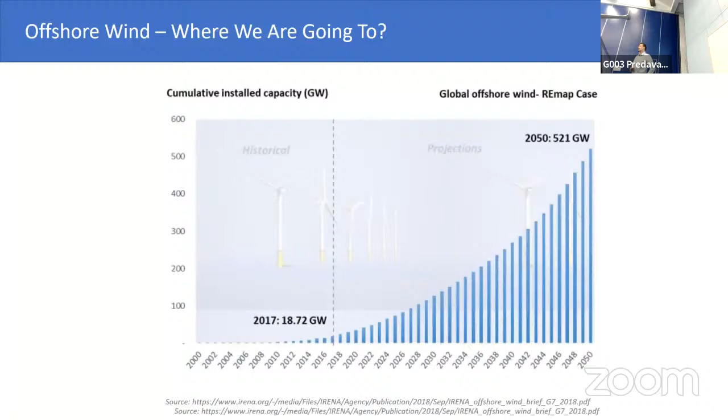So where are we heading actually? The aim is, up to 2050, to get more than 500 gigawatts installed. The European Union, who is leading in this, Europe as a whole, because actually Britain is leading, has the plan to have more than 60 gigawatts installed by 2030 and 300 by 2050. The market is growing around 25% yearly so far.

So what is the potential of the wind? The potential of the wind actually depends on the technology we are using in the wind turbines, but currently it's estimated at about 420,000 terawatt hours. This is more than 18 times the global electricity demand today. For comparison, Croatia consumes around 18 terawatt hours gross per year.

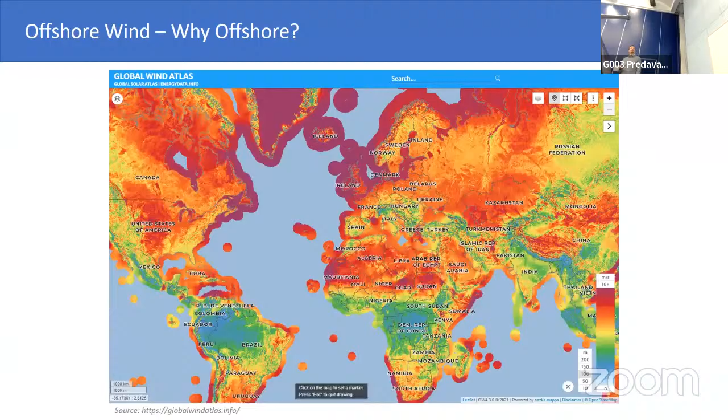And why offshore wind? This chart actually shows nicely why. The wind speeds are more steady and they are higher on average offshore than on land. And you see where the best parts are here, and the UK, as I said, is already leading in this.

So the evolution of wind turbines. They started as very small ones. When I entered the industry, around 2015, they were mostly 5 to 6 megawatts. Now the latest one installed and in operation is in the Netherlands, it's 11 megawatts, and they are currently testing 14 megawatts. When we are planning the new offshore wind sites around Ireland, we are planning for 24 megawatts, which is not even in development yet. But in 10 years' time, this can be the case.

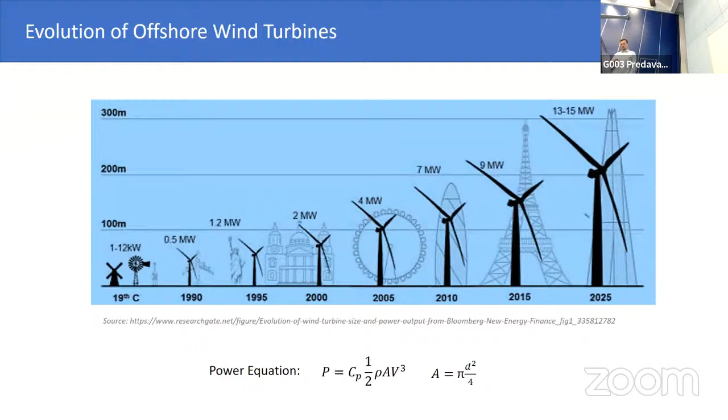And why are they getting bigger? Because the power equation tells us that there is a coefficient of how much kinetic energy from the wind we can get, and this is fixed, and practically the wind speed is fixed. It can rise a little as we go higher with the wind turbine tower, but by changing the diameter, we are getting more power. So this is why they are getting bigger and bigger. Currently it's around 230 meters diameter of the wind turbine.

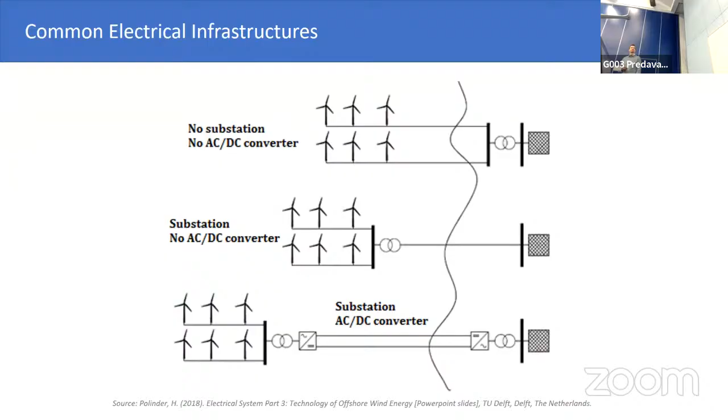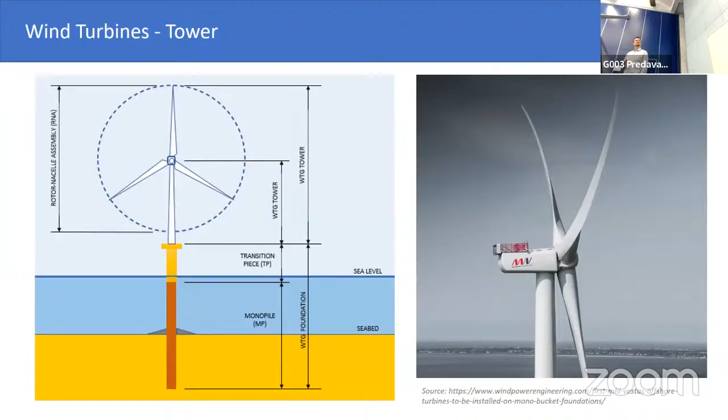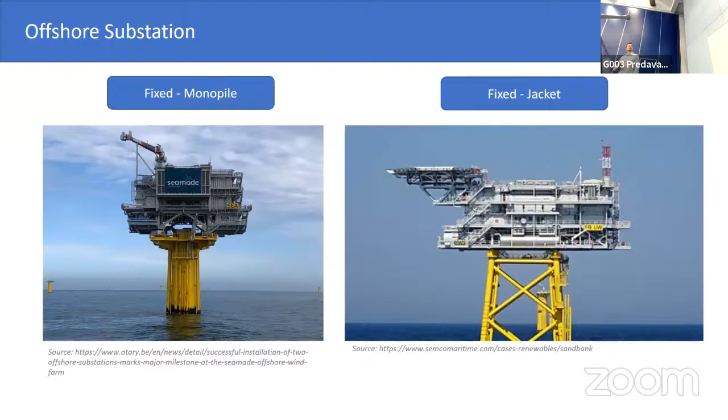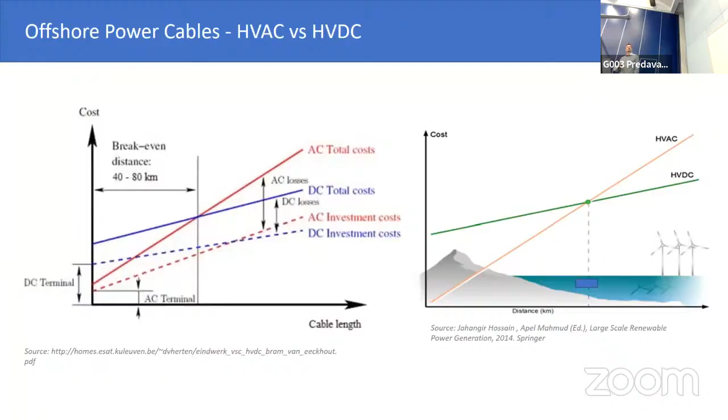Why is there a difference? Why are we using AC and DC cables? We are using them because AC cables are good up to a certain length from the shore. All the wind turbines actually generate AC power, so to have DC we need a converter offshore to convert it to DC current to be able to export it to the shore. And the problem is that this substation is around 7 to 10% of the total investment of the wind farm, which can be billions of euros. So basically, up to approximately 80 kilometers, the AC cables are cheaper. Then the losses in the AC cable become higher than the investment costs of the converter.

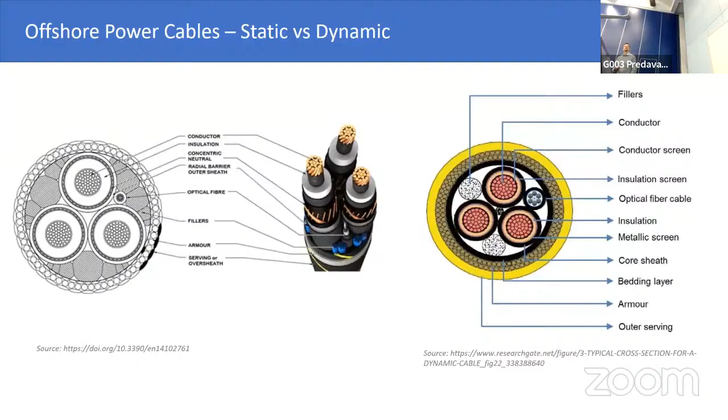This is how it looks. A cross section, 3 cores, and some optical fibers. Normally, the inter-array cables are all 33 kilovolts, and now they're becoming 66 kilovolt cables, and the export cables are between 120 and 400 kilovolts. And we have a dry, semi-dry, and wet design of the cable. Wet design means that the water can penetrate all the way to the core. We have all sorts of other systems to protect the cable.

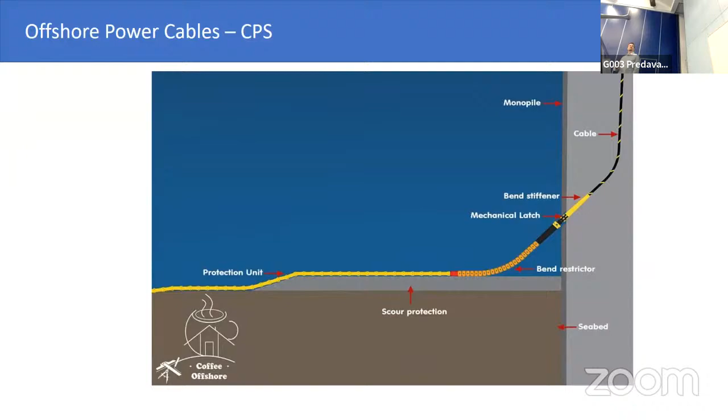This is a fixed foundation. This is the seabed. This is the scour protection, and this is a CPS, the so-called cable protection system. Basically, the cable is trenched here, but here we cannot trench it. So one part of the cable is exposed to the wave and current conditions, and is susceptible to fatigue. This is why we put it in these bend restrictors, to protect the cable. The design life of the wind farm is typically 25 years, as well as the cables. Typically, these are the stages of wind farm development, based on the UK concept.

So first, there is a governmental body that would make studies, numerical analysis, and measurements of the wind speed, and they would say which areas can be used for wind development. Then they put out a tender, and the developers apply for the tender.

They make their own site assessment to check which site is the best, most financially viable. Then they go into the planning, development, and engineering phase. When the contractor is chosen, it goes to final design and construction, operation and maintenance, and at the end, the decommissioning. We remove everything we installed.

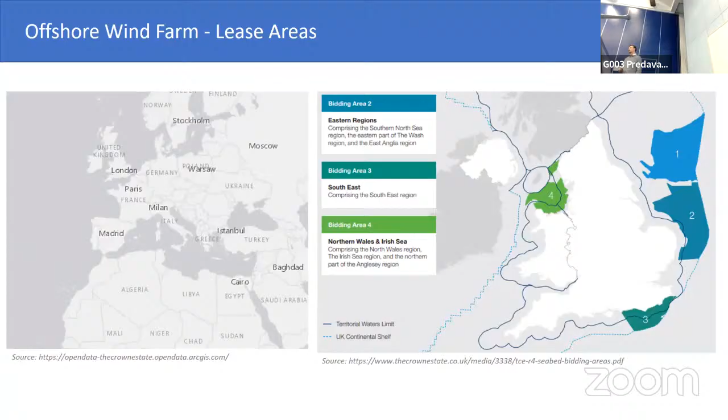So, for example, this is how it looks. This is the 4th round in the UK, which is probably the most highly developed market in the world for offshore wind. They offered these big areas for developers to bid on. Developers check the wind potential in each area, and they bid for certain parts.

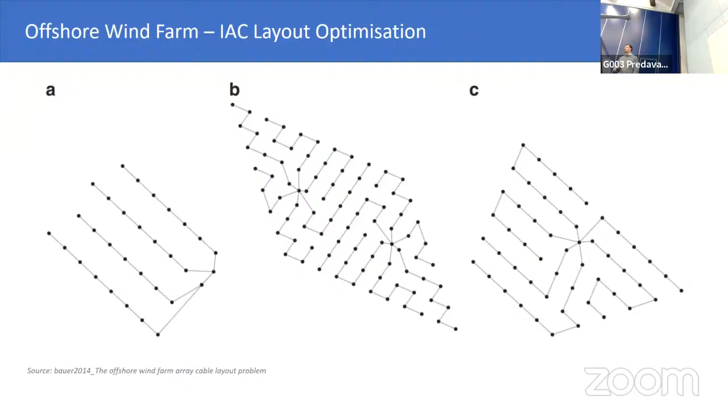This is the wind farm. Before, turbines were just put in a grid layout, but you have this wake effect, which consumes the energy of the other turbines. So nowadays they use optimization techniques to optimize the layout of the wind turbines so they maximize the energy extraction. We also optimize the connections of wind turbines to minimize the losses in the cables.

This is the construction of the wind farm. For example, there is a lot of surveying, geotechnical surveys, boring, drilling, geophysical surveys before the detailed design phase, and then we go to the construction phase.

Normally we use a vessel, which can be a floating vessel, for pin pile installation, so for foundation installation, and then we use jack-up vessels to install the tower, the blades, and the nacelle. It takes around 1 day to install one turbine, more or less. And then we have the cable lay vessels to install the cables.

And I will just mention a bit about smart grids. Before, the idea was you had the energy producer and the energy consumer, and the energy went only one way. Nowadays, we are trying to optimize the grid so that the consumer can also become a producer by putting solar panels on the roof and things like that. Before it was only one direction. Now there is communication between all of them.

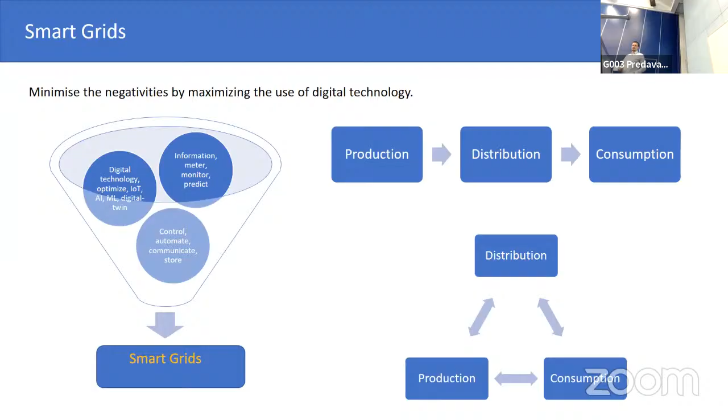By implementing digital technology, AI, machine learning, digital twins, storing data, control, and automating processes, and by measuring, monitoring, and predicting, we can optimize consumption and balance the energy supply with the energy demand.

Before, for example, wind turbines were acting individually. Nowadays, there is already software that uses machine learning and similar techniques to automatically change the blade orientation and the turbine orientation so that they maximize the energy extraction of the whole wind farm. So it's not only about measuring one wind turbine, but how, if we change the parameters of this turbine, we can increase the efficiency of the whole field.

We are also measuring stresses and strains in the structures to see how much fatigue life we have consumed and what the structural health of the structures is.

Nowadays there are some new emerging technologies and advancements. The biggest issue is obviously the storage of power, because we cannot control when the electricity will be produced, when the wind will blow. So how will we store this power to use later? We can do power-to-X conversion: power to heat, to liquid, to gas, to mobility, to power. We can have the hub and spoke project, which I'll talk about later, or offshore storage, such as hydrogen energy storage or compressed air energy.

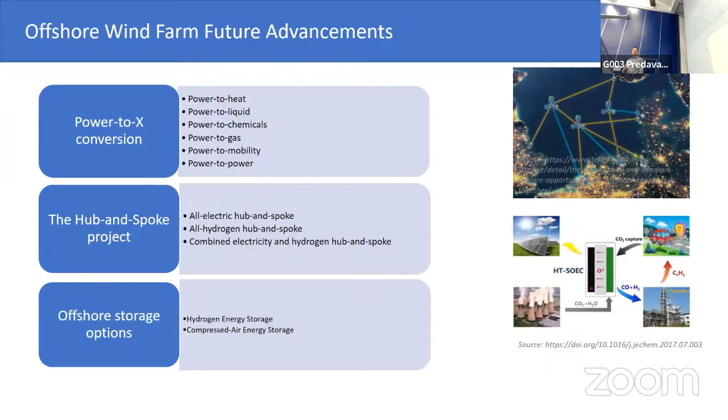So basically we can generate the electricity, and then use the extra electricity to heat boilers inside houses, etc. We can use it to store energy in electric vehicles, and then use this energy from the vehicle when it's not being used, and things like that.

This is the hub and spoke project. It's basically making an artificial island connected to 10 to 30 gigawatts of offshore wind farms, and this island would be connected to several different countries, so the energy can be switched from one country to another as demand grows in different parts. This is the classical one, where we just transfer electricity, or we can convert the electricity to hydrogen and transfer the hydrogen onshore, or we can do both.

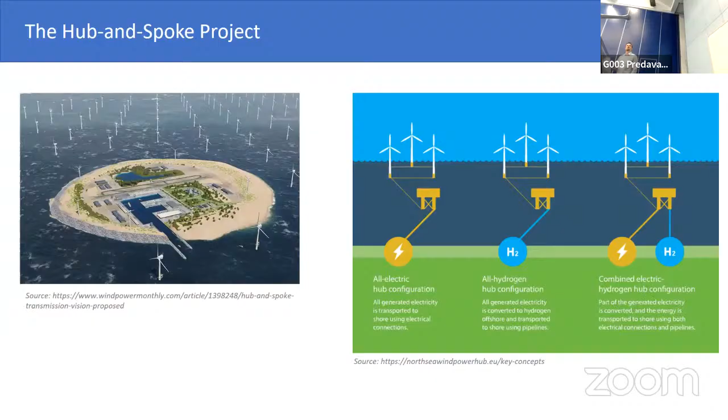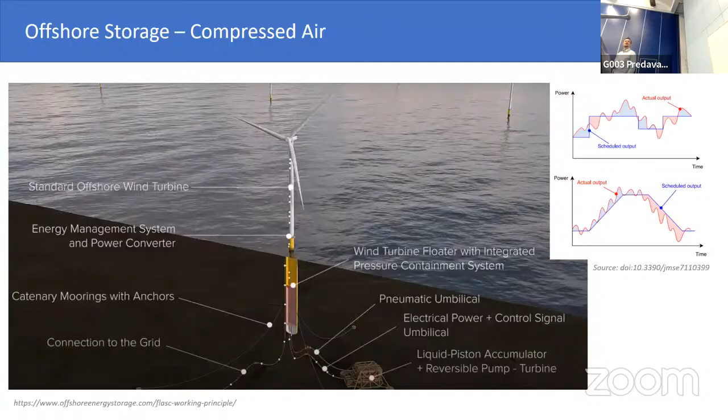And for storing with air, we put an air compartment on the seabed. When there is no demand for the electricity, the surplus electricity we just convert to pressurized air. We actually pump the air here under pressure. And when there is no wind, we can use this by releasing this air through the turbine and generating the electricity. And this way we can also control the peaks in our supply. That's all. Thanks for your attention. Do you have any questions?

Thank you. Thank you for thinking a long time.

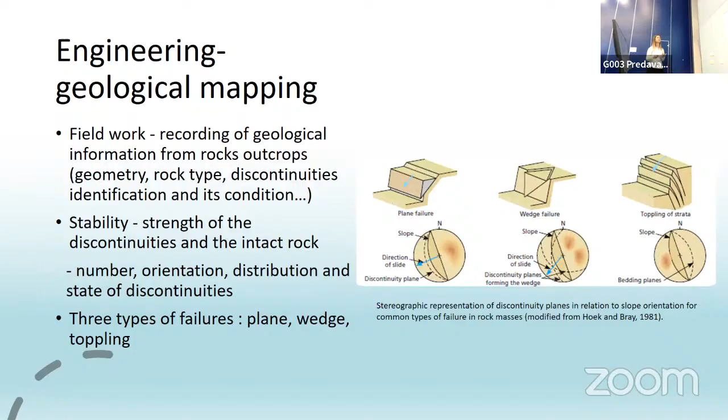On the next slide, I have put three pictures that represent the three types of failures. Here we have a plane failure, wedge failure, and toppling.

So why is engineering geological mapping important? It is important because it is the first step when we have some kind of geotechnical problem. We first go to the field and we have to do outcrop stability assessment. We use one of the given classifications. It is either GSI, RMR, SMR, Q classification, Colorado classification.

We have to choose a type of rock mass classification that is suitable for the type of the project that needs to be carried out. Because the information we gather with rock mass classifications, civil engineers use it as the input data for geotechnical design and then to predict protection measures for the rock outcrop.

Shortly about geological features of the area. As I said, the road is positioned on the Istrian Peninsula, and it is part of Učka-Čičarija. And if you speak to the locals, you will hear that this is part of White Istria because it's built out of limestone and dolomite, which are white in color. And it is a tectonically very active area. It was in the geological past, but also today.

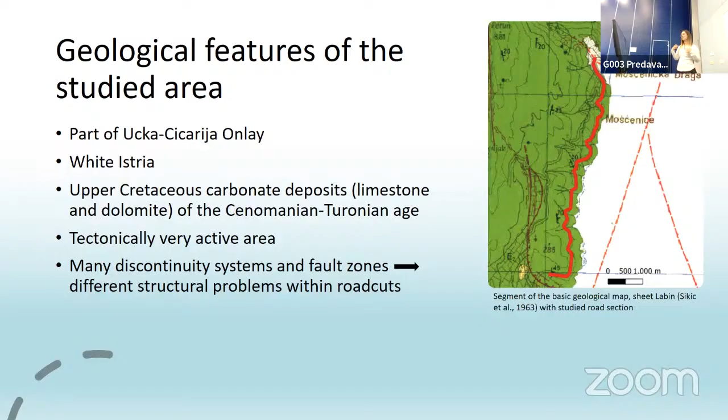And this results in many discontinuity systems and fault zones, which result in different structural problems within road cuts. The other factor that contributes to that is the curviness of the road, which cuts the orientation of discontinuities in different ways, and that creates different kinds of failures.

A little bit about classification. Rockfall hazard rating system was developed in the early 80s in the state of Oregon in the US, but as the infrastructure grew and the frequency of the traffic increased, they had to modify it to the current state, and that was done by Russell in 2008. It is used on large scale road sections when they need to define rockfall project priorities and allocate the limited funds.

Factors that contribute to the rockfall according to this classification are slope profile factor, geological factor, climate, presence of water on slope, which gives us total hazard score, and also rockfall history, number of traffic accidents attributed to a rockfall, that gives us total risk score. And if you compare both of those factors, you have the result of which sections you need to prioritize when you have to remediate the slopes.

Here I listed geological factors. They are degree of undercutting, jar slake, weathering degree of rock mass, block size or volume of material expected to fail, number of discontinuity sets, persistence, orientation, aperture, weathering condition, and friction of discontinuities. I think that for most of them it is clear what it means. If something is unclear, you can ask me afterwards.

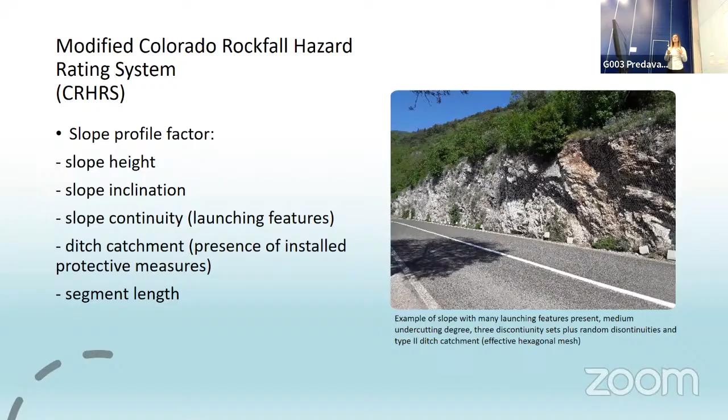I wanted to give those examples to show you how easy it is to score the slopes with this system. You only have a few things to take into account, and you're quickly done.

Then we have climate and presence of water on the slope, which takes into account annual precipitation, occurrence of freezing and thaw periods, seepage or water present on the slope, and slope aspect. Slope aspect means to which direction of the world the slope is oriented.

Precipitation amounts can be found on web pages of meteorological stations. In each state, you have annual, monthly, even decades-long data as the base for that.

There's also rockfall history, which is the frequency of rockfall occurrence. Unfortunately, there is no official data for Croatia, so to get this information we had to talk to locals, to road maintenance, and search articles in newspapers for when something happened.

And the last factor is traffic conditions. We have sight distance, average vehicle risk, and number of accidents caused by rockfall. Sight distance here is very important because it also takes into account the posted speed limit.

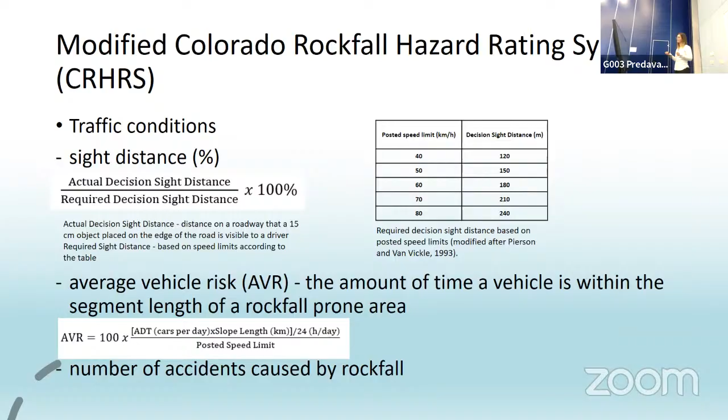According to the posted speed limit, we can calculate how far you can see, what is your angle of viewing when you're driving. So this is very interesting, actually.

According to the number of given points for each zone, we categorize the zones into overall hazard categories and overall risk categories. Overall hazard categories are low, medium, and high, and overall risk categories are low and high. If you compare overall risk to overall hazard, you get three groups.

These groups are A, B, and C. Group A is the one where it's not necessary to fast remediate, and group C requires urgent remediation measures.

So finally, results. On the road of 6 kilometers, we singled out 66 different zones with lengths from 20 to 300 meters. We defined those zones during engineering geological mapping and grouped them according to similar slope characteristics.

As a background to this classification, since it was new and we didn't know how applicable it would be to our civil engineers, we backed it up with discontinuity set orientation measures and defined possible structural failures. So they also had that additional information.

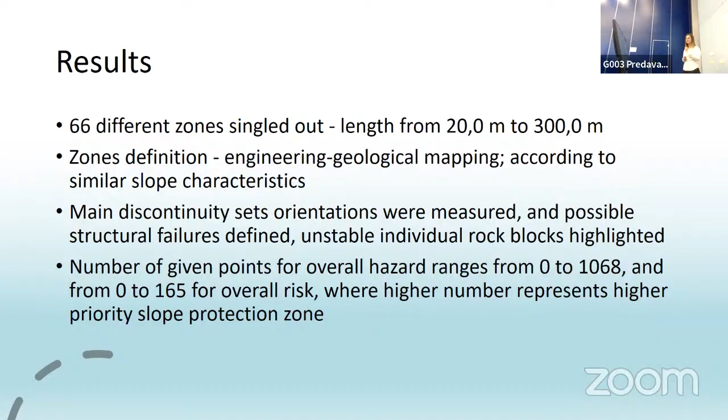We also highlighted individual rock blocks that are unstable, where present. The number of given points for overall hazard ranges from 0 to 1068, and from 0 to 165 for overall risk, where a higher number represents a higher priority slope protection zone.

13 zones are categorized into group A, 16 zones into group B, and 37 zones into group C. From that we can see that most of them are categorized into group C, which confirms the geologically complex, wide area that poses significant rockfall hazard.

According to the recommendation on the study road section, different slope protection measures were carried out: underpinning with stone blocks, installation of galvanized double-twisted hexagonal wire mesh with or without steel ropes, installation of rod and self-drilling anchors, installation of shotcrete, profiling of rock slopes, installation of New Jersey bumpers, and removal of potentially unstable blocks.

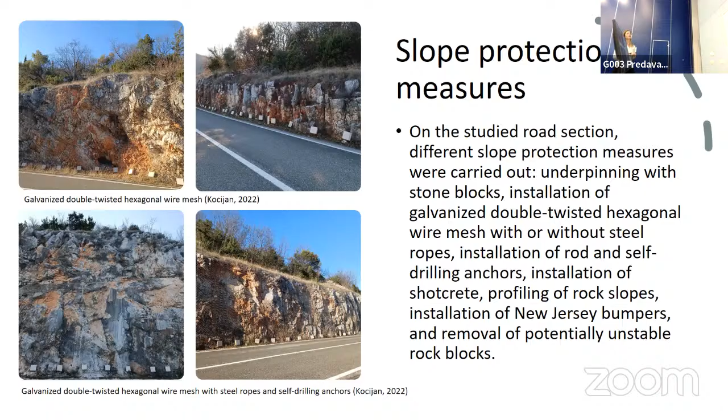Here are four pictures of slope protection measures that were carried out. I couldn't photograph all the measures because there aren't many stops along the road. In the first two pictures we have double-twisted hex wire mesh, and in the other two we have hex mesh with steel ropes and self-drilling anchors.

As a conclusion, this is a very interesting rock mass classification. It is simplified according to the geological aspect and can be done faster, but it also takes into account the climate factor, the traffic factor, and rockfall history. It's useful for large-scale road sections.

It would be very useful to further develop sedimentary rock mass classification, including flysch rock mass as a separate one, since in Croatia most of the coastal area is built out of carbonate rock or flysch rock mass. To do that, we would have to standardize the classification to the metric system, and also to seasonal traffic frequency, since traffic in Croatia is much higher in summer, and to climate features, since in the US they have freeze and thaw periods, and here we don't have that.

Unfortunately, until this point there is no systematic mapping of road outcrops present. We only go to the field when rockfall occurs and funding is available. This would be very useful to do, because the geological complexity of the wide area poses significant rockfall hazard, and systematic mapping with this classification would give us an overview of potential hazardous sections over the country.

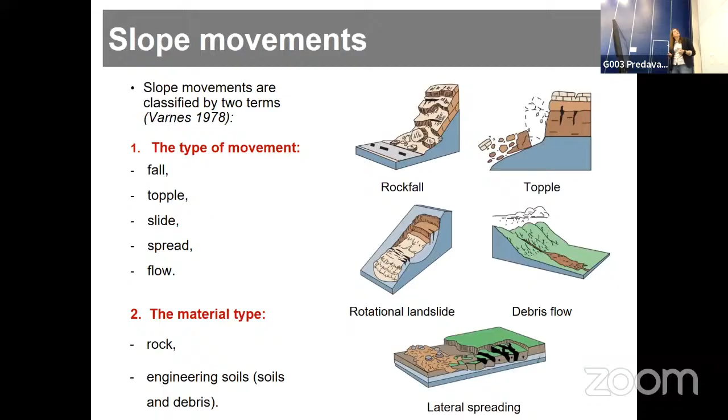What is actually a landslide? Landslide is considered any movement down the slope of a mass of rock, debris, or earth. Landslides usually occur when shear stresses acting on a slope exceed shear strength of the slope itself or the material forming the slope, that is the resistance to shearing of the material.

There are many triggers of landslides, from snow melting, heavy and recurrent rainfall, to earthquakes, even avalanches and other triggers, but we divide major causes into geology, geomorphology, and human activity.

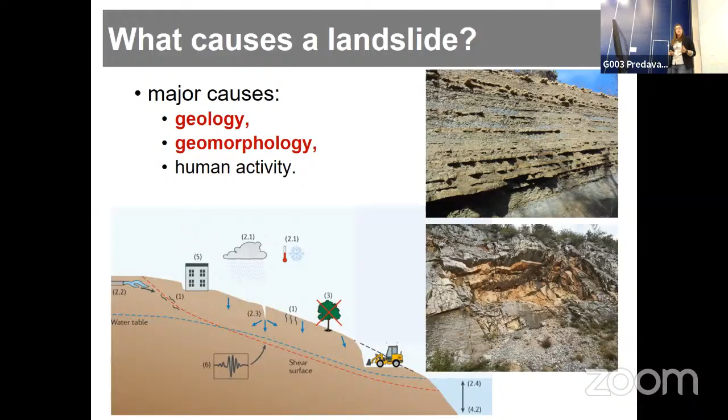And of course, maybe the main cause in this modern time is human activity. Due to a large increase in population growth, a lot of slides happen because of agriculture, construction, illegal slope cutting, mining, and so on. On these two right pictures, you can see landslides that happen due to mining related activities.

Although most of the landslides don't happen in a populated area, a large number of landslides occurs in extremely populated area and affects millions of people, causes hundreds and thousands of injuries and death each year. Of course, there is a huge economical effect annually, millions to billions of dollars of damage.

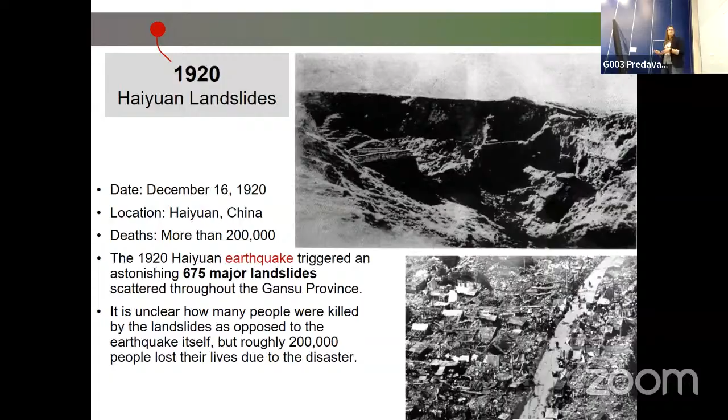It had such an effect that some of the rivers changed their course, some rivers were dammed, and around 200,000 people died from the landslides and from the earthquake itself.

But the landslide that happened 10 years after happened after a 15-day period of a record amount of rainfall, and this landslide moved very rapidly, so there were some casualties. Unfortunately, even though the landslide was studied by scientists, this movement was not predicted.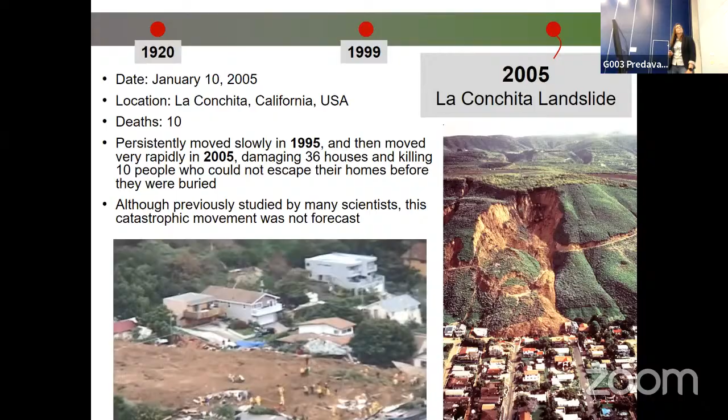The village was protected by the mountain, but a mega tsunami was formed and overtopped the dam and went down to the valley, and completely destroyed the village of Longarone. Interestingly, there was no bigger amount of damage to the dam itself.

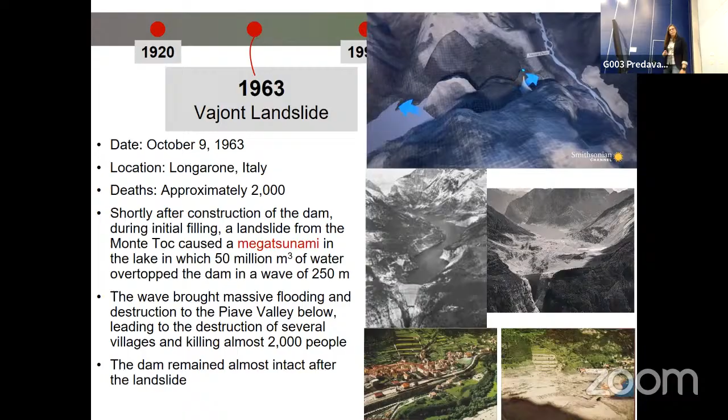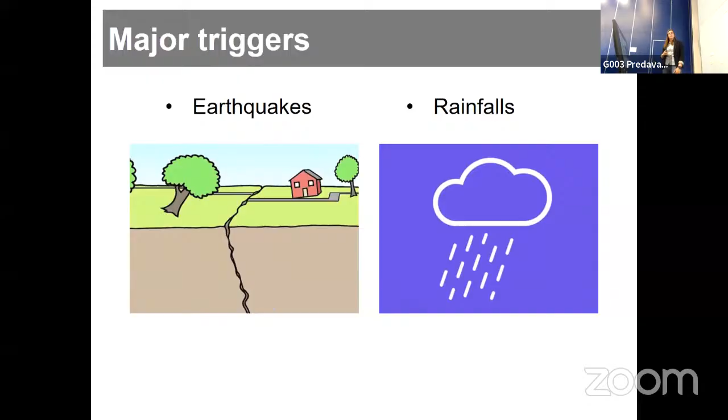Well, why is that so? We can attribute this to climate change. Earth's surface is warming up. There is a lot more evaporation, and of course, because more water goes into the atmosphere, more precipitation occurs. So, of course, there is more precipitation than before.

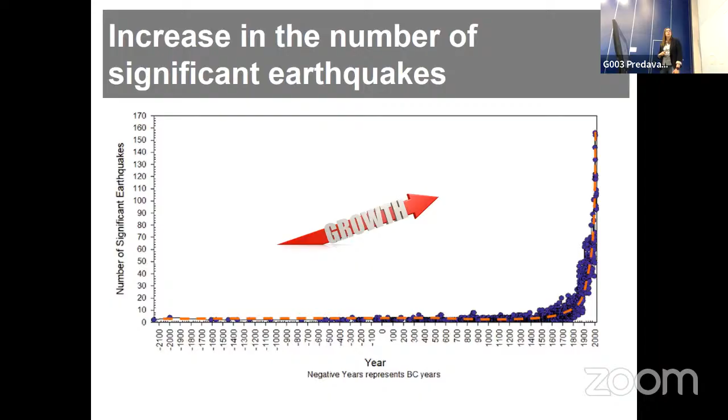So these two effects, the increase in significant earthquake events and trends of higher than average precipitation all around the world, combined with growing population needs, urbanization of all areas, construction, infrastructure development, and so on, lead us to the increasing number of slope failures. So more and more landslides. The risk of landslides is not reducing, the danger is getting bigger because of all these elements here.

One of the means of reducing the risk and dangers of landslides are landslide remediations. Remediation measures have the aim to reduce the active forces acting on the slope and to increase the resistance of the soil at the slip surface of the slope, or to combine them. On the figure below, we can see almost all the possible remediation measures that are used in the geotechnical engineering field, from installation of drainage and geogrids, to retaining walls or bolts, to using vegetation as a means of stabilization, or friction piles. So everything in one picture.

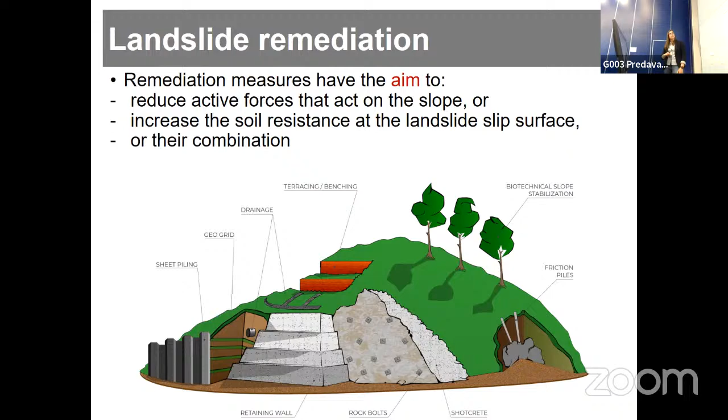And now we get to the idea of our project, the idea of physical modeling of landslides. Why use physical models to investigate landslides? They enable us to investigate and gain new knowledge in the field of soil material of landslides and remedial constructions that cannot be achieved in real size landslides. So it's not possible to predict remediation for all kinds of materials, places, and all kinds of landslides.

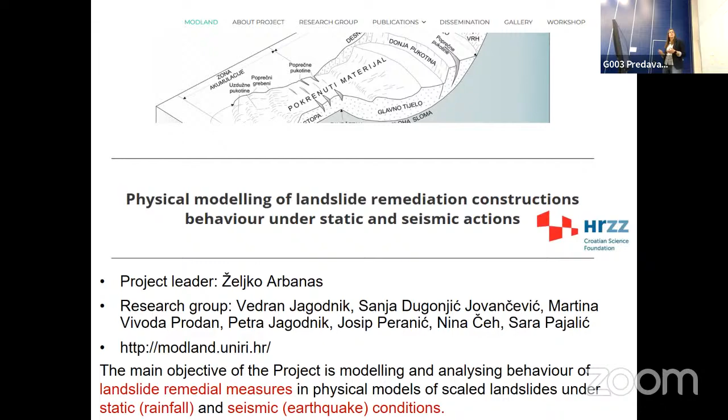This is just our project, name of our project, funded by the Croatian Science Foundation, members of our research team, our website. The main idea, the main object of the project is to analyze and model behavior of landslide remedial constructions of scale landslides under static and seismic conditions. That is the major triggers that we mentioned before: rainfall and earthquakes.

Since we have two major triggers, we have two different physical models, one in static and the other in dynamic conditions. The first model is a bit bigger. I will say later why the dynamic is smaller. It consists of steel elements on a working table and transparent plexiglass walls, which allow us to monitor the infiltration of the water in the slope. Model is 0.5 meter in height, the height of the plexiglass walls. So the maximum depth of the soil in regard to that can be only 30 centimeters. Slope inclination can be adjustable from 20 to 45 degrees. And later I will show you two tests at slope inclination of 35 degrees with and without remediation measures.

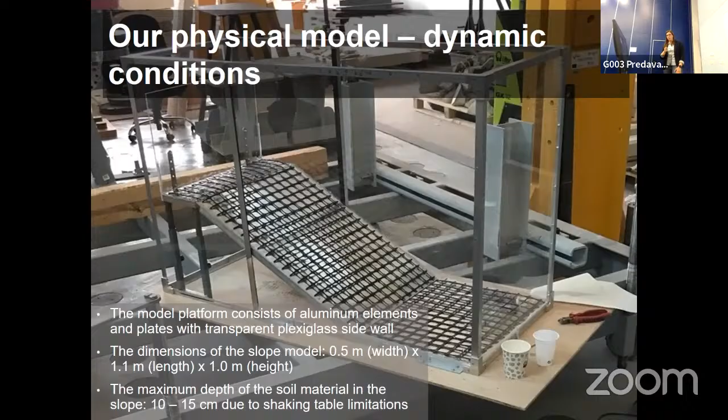The other model, the smaller one, is for dynamic conditions. Its elements are made of aluminum to make it more light, again with the transparent plexiglass side walls. It is now 0.5 meter wide and 1 meter in height. Again, we have a maximum depth of the soil material from 10 to 15 centimeters, this time due to the limitations of the shaking table that provides the dynamic excitation. Earthquake is simulated by a shaking platform, a dynamic excitation. We have uniform seismic excitation of sinusoidal shape. As rainfall intensities could be adjusted in the static conditions, here we can adjust amplitude and frequency. So this is the shaking table our model lies on, mostly because of the limitations of the model. This is much smaller than the static one.

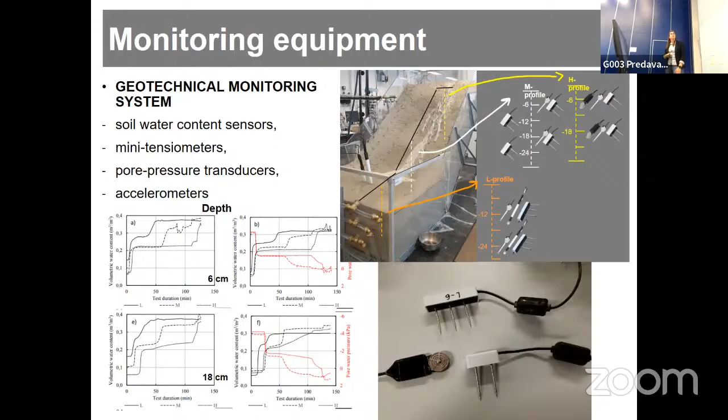And getting back to the landslides and the complexity of landslides, there are a lot of elements that must be satisfied when trying to compare physical models and real-life landslides. You can see all of those elements here in these circles. We have elements regarding geometric, dynamic, and kinematic similarity. All those arrows mean that all of those elements are interdependent.

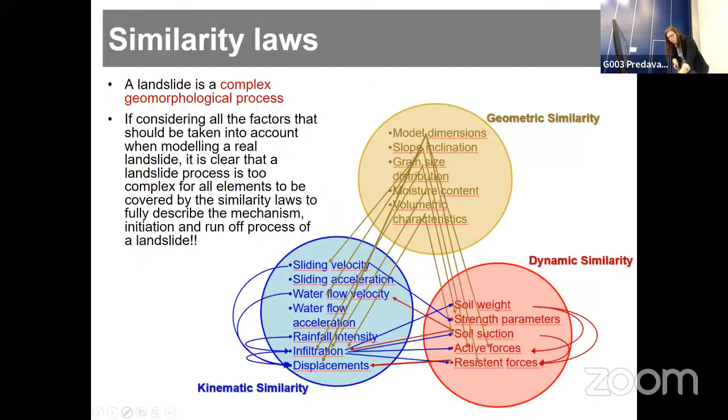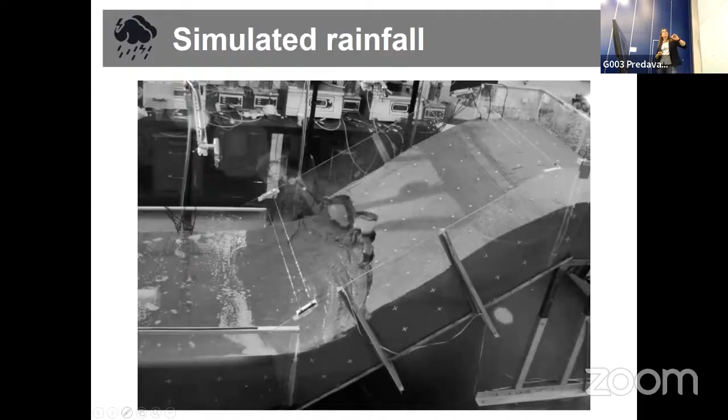As rainfall falls onto the slope of the model, rainfall is infiltrated into the model, and we have a formation of the groundwater table at the lower part of the slope. The groundwater table reaches the surface and the toe of the slope, and there we can monitor in the beginning of the video the formation of the first cracks and the first failure.

After that, the landslide slip surface develops retrogressively to the top of the slope, which is shown in the end of the video, and then it stops when there is no more material to slide.

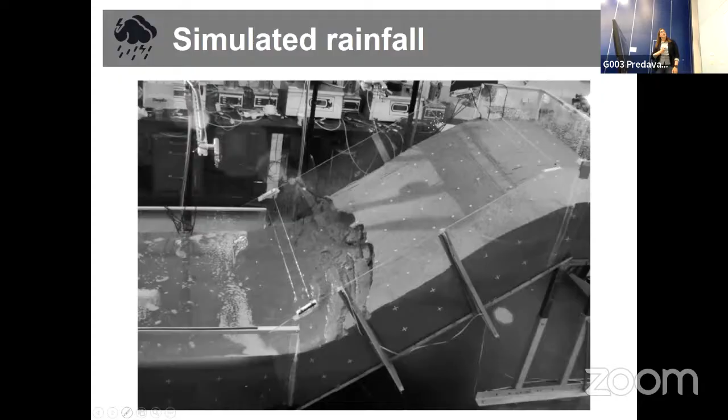And the other model, where our slope is induced by the shaking table. Here we have a different type of failure. We have a failure at the top of the slope. Of course, we can adjust here different frequencies and amplitudes to initiate the slope failure, limited a lot by the size of the model. So this failure was a bit harder to obtain.

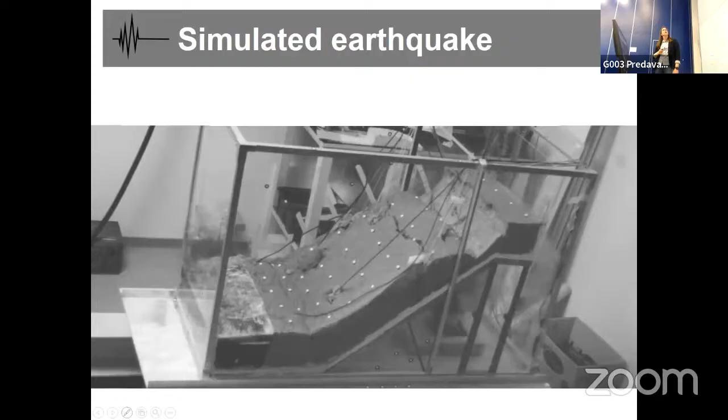And for the comparison of the remediation measures, this is the small scale model of a sandy slope at 35 degrees inclination with and without remediation measures under same rainfall intensities. The remediation measures were gravity retaining walls that were 3D printed. And again, pictures from the same slope model that I already showed you in the video. This is when the failure already occurred, and now it retrogressively develops to the top of the slope. This is the last one.

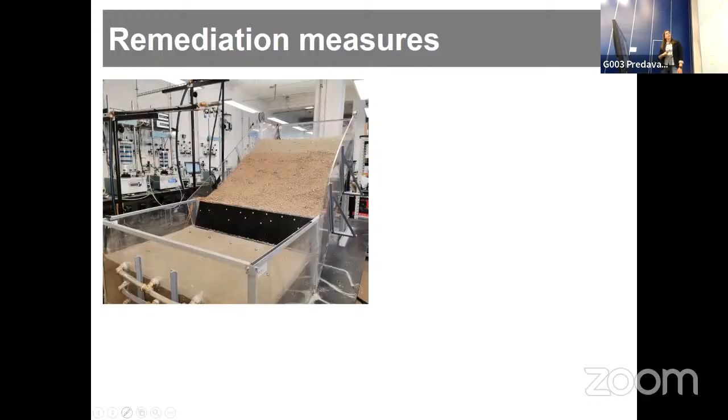And when looking at the other model with the gravity retaining wall, this is before the start of the test, and this is at the end of the test. You can see that there are no cracks at the slope. Only after the rainfall was intensified in the upper part of the slope, there was too much water to infiltrate the model. The process of erosion started and a debris flow was initiated.

This is the look of the gravity retaining wall after the experiment, and this is a short video of the debris flow. So no cracks in this part of the slope. Of course, the material behind the wall was replaced, sand was replaced by gravel.

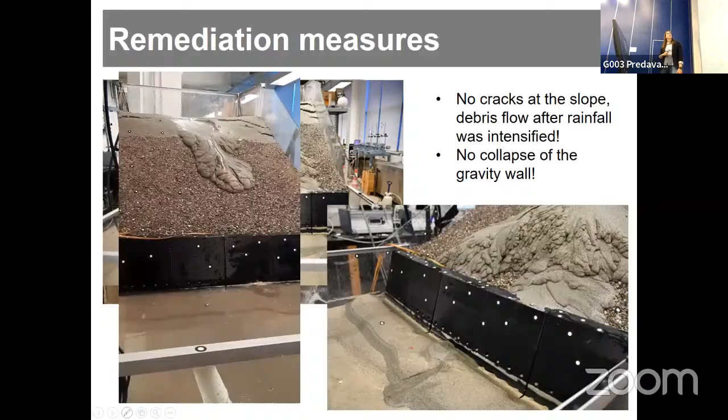So to conclude, I would like to say that this is just a part of the research of our team, of our project. Landslide is a very complex process, and a lot of different fields and areas in this process can be investigated. These physical models can be used with a variety of initial settings, conditions, different materials, different remediation measures, not just gravity retaining walls, but also pile walls, gabion walls, etc. So this research can continue many more years after our project ends. So it's a very, very wide field.

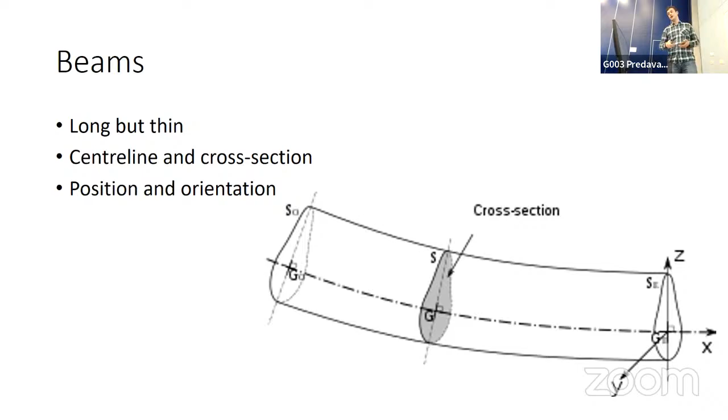So we have some sort of line which is traveling through the center of the object, and then we have a cross section which is perpendicular to it and describes the entire volume. And we try to describe all our structures with this kind of theory. To have the full description of our body, we basically need the position of this line and also the orientation of the cross section, since it can be perpendicular, but it can also tilt a little if you have some stress inside. Now let's start with the industrial applications of this theory. I will start with the first example, which is manufacturing yarns and ropes.

This process is really old. We know it from antiquity. We have fibers, or strands, which are then twisted around each other to form a rope, and then you can also use these smaller ropes to make larger ropes and so on. So just twist them around each other, which makes them stronger and so on.

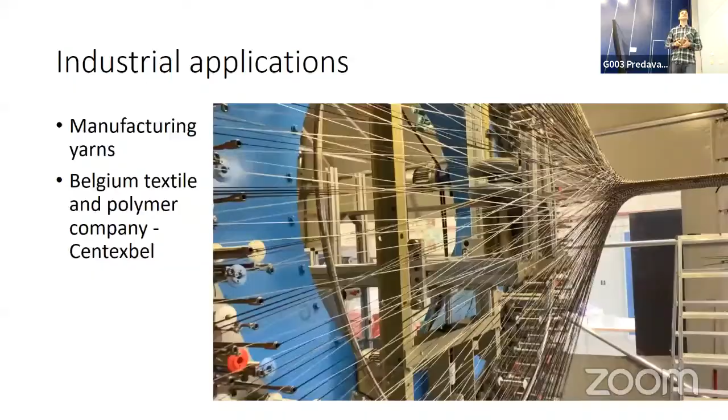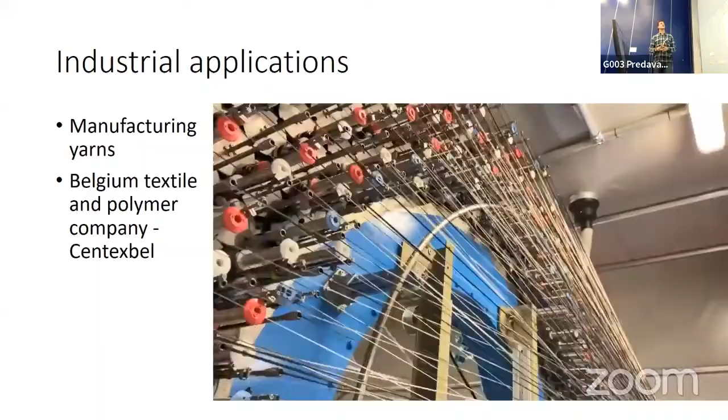This is the advanced application of the same process, but today. So what we are looking at is basically steel wires instead of, I don't know, cotton fibers, and they're no longer making a rope. They're making some sort of elongated structure, and instead of 3 simple yarns, you have I think 250 of these wires all twisting together. So it's a really complicated process. And this is an example from a Belgian company, Centexbel.

You can also switch these wires and, instead of steel, use carbon fiber and stuff like that. So you can have really complicated braiding, which results in new shapes. But to be able to produce stuff like that, you need to be able to model it. It's no longer as simple as before. You no longer have 3 strands you just twist together. You have lots of motion going on. You have to be able to simulate the motion of the strands themselves, but you also need to take into account the bending of these wires. So it's really a complicated process.

These are some of the simulations that are going into their research. Here is actually my simulation of twisting 2 wires, but you can extend that to n number of wires. Here are some of their really complicated simulations. You have twisting of the fibers, so they form strands, and then strands twisting around each other to form rope and so on. This is one interesting application of the beam theory that I quickly explained before.

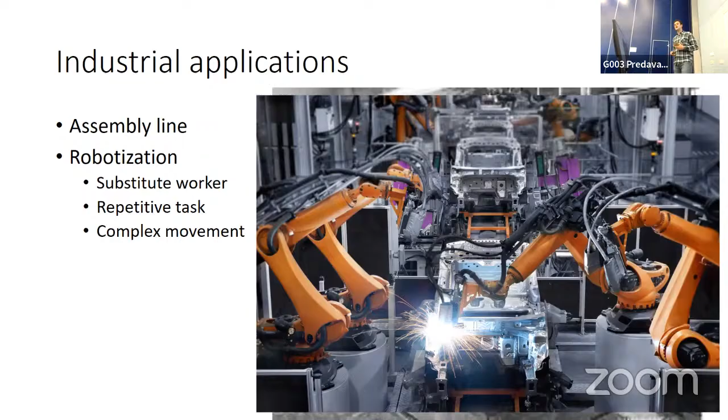But there's a new generation of robots which are no longer focused on replacing the worker, but on aiding the worker, to help them do the work efficiently, or where it perhaps wouldn't even be possible. For example, an extreme environment, maybe underwater or really hot, or very delicate pieces that need to be precisely moved together, or lifting a car, a robot can help. You still need to give it some instructions, but it is able to do some tasks autonomously. Here is an example from Belgium, University of Liège.

It's a robot trying to pick up an apple. It seems like a trivial problem, but it's really hard for a robot to do stuff like that. This robot is being taught how to pick up an object that is of general shape and a little bit unpredictable. For example, you can replace the apple with a coffee mug, or potato chips, and it should still be able to pick it up.

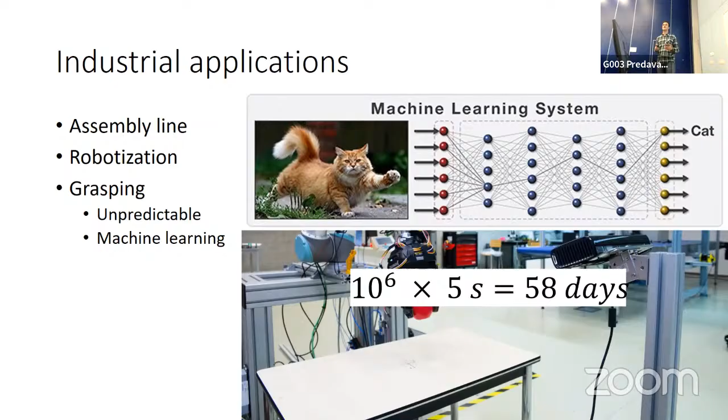So you need to be able to do it virtually. What they're doing is making a digital model of the robot, and then trying to lift the apple virtually on the computer. They can then run all of these million experiments in a matter of minutes. This is basically a robot model.

Here they tried two different approaches. The first approach is obviously the simplest one: they tried to use stiff or rigid arms instead of...

This robot, maybe I can go a few slides back. It's basically made of two arms and then some tool at the end. They tried to model the thing as if these arms were rigid, which they look like they are because they're really thick and so on.

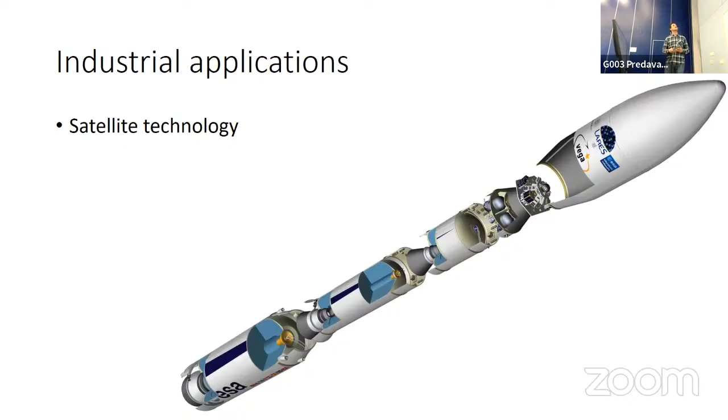So you basically burn the first stage, drop it, burn the next one, drop it, and so on. At the end there's a really small part with the actual payload that the rocket is trying to lift into space. This is usually a satellite. It can also be, I don't know, a nuclear warhead, or maybe people if they're going to the International Space Station.

On the actual mission that took place to carry up the satellite I was working on, it was, I think, the first application of this technology. So instead of launching a single satellite, they launched 50 satellites. How did they do that? Basically, they have some central structure to which the satellites are connected, and then once it's up in space, they just release them one by one.

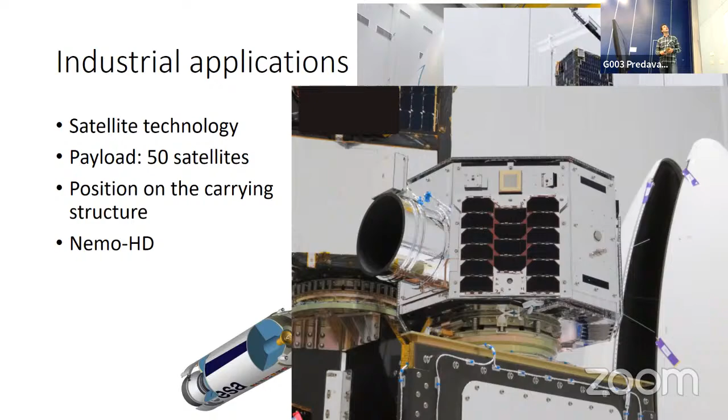The part that I was interested in was actually this back part of the satellite, which has 4 small antennas. So you see, we're going from this 100-ton rocket to just a few grams of material making these antennas, but still it's important to simulate them, because they take really a lot of space, which is wasted since there isn't a lot of material there. The idea was maybe to bend them in some way, or press them against the sides of the rocket or the structure holding it, which would reduce the amount of space. But the danger is that you only get one chance to do it—if this results in any damage to the antennas, you're basically launching dead weight, so it's not useful anymore.

So you need to be sure that this will really be able to endure all those vibrations during the launch. Again, you need to use the beam theory I was talking about before. Especially here it's important that you're able to control the dynamics of the end. So you have a complicated problem because you have the dynamics, the motion, the vibrations of the rocket, which are moving the antennas, and then you also have the contacts—for example, if the antennas are hitting into the container and so on.

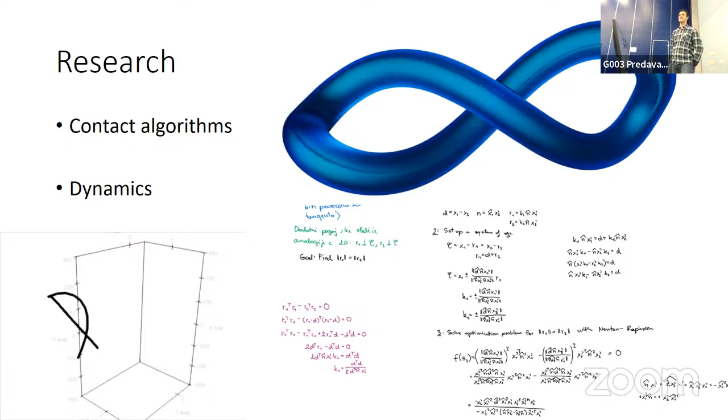Before, when you showed how you model the two things wrapping around each other, and the other more complex one - how is the model actually built? You mean this one? Yeah, so do you mean like, so we use finite element methods.

You have two initially straight beams, which are discretized into smaller elements, which are geometrically exact beams. So you have the center line, which is deformable, and you have a rigid cross section. This analysis is quasi-static, so if you can neglect the dynamics of the problem, you can use the quasi-static analysis and really speed up the process. So this is one of the optimizations.

As I said, the contact is detected. This is actually one of my research topics, to be able to detect contact not only at single points, which is how it was usually done, but along the entire length of the element. So for example, if this is divided into, let's say, 10 elements, then along the entire length of this element, you still have a force. It's not only at the boundaries of these elements, not only in the connections.

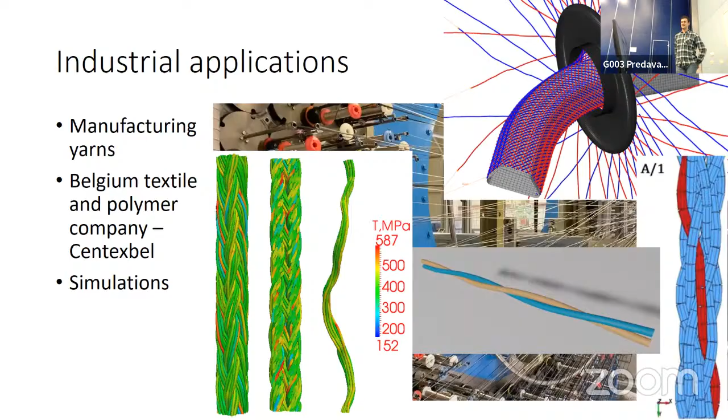Thank you, Jan. This is just for your preparation and discussion. Thank you.